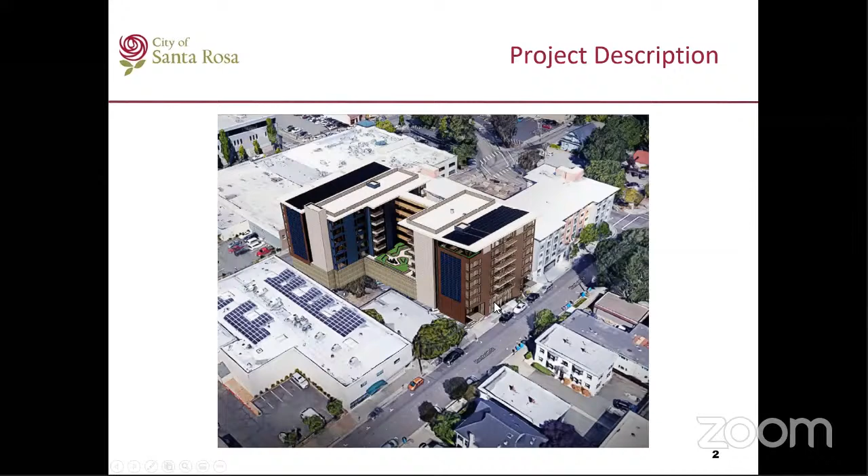Much of that remains the same, but here's a bit of what the changes are. The original project is 8 stories, mixed use, mostly residential building. The new version cuts the top story so it's a 7-story mixed use residential building. The original approval had 94 units, although density is not regulated under the Downtown Station Area Specific Plan.

It goes by FAR, floor area ratio, and so there's 88 units presented here. The breakdown was originally approved as 5 studios, 65 one-bedroom, and 24 two-bedroom units. Now there are 14 studios, 64 one-bedroom, and 10 two-bedroom units. Most of that came from having to reorganize how the building and all the units sat, with the changes done by the applicant.

Floors 1 and 2 are mixed use, and floors 3 through 8 are residential - that remains the same, except now floors 3 through 7 are residential. The square footage previously approved was 136,953 gross square feet.

Approximately, the current version is plus or minus 117,432 gross square feet. The internal courtyard and roof terrace remain the same size. The original approval was 86 feet tall, and this one is 77 feet tall. And there were 71 parking spaces previously approved, and 69 parking spaces with the revised version.

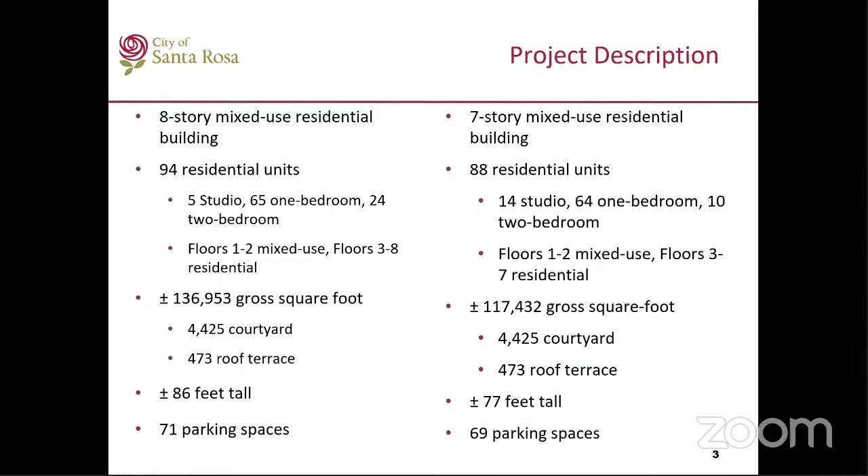So the general plan and zoning is core mixed use within the Downtown Station Area Specific Plan, with an FAR of 8. The modified project is right at the midpoint required by the zoning code, and the use itself is allowed by right. So it was just a design review pursuant to the resilient city development measures.

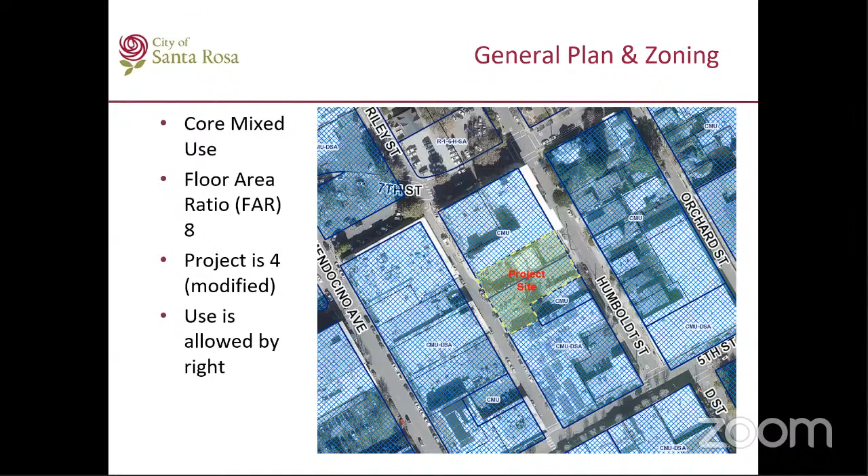So just to rehash some of what I said, the original approval was minor design review. After a concept design review, the item is taken before the design review board. That did happen on January 21st.

And the approval by the ZA was on March 24th, 2021. Zoning code section 20-54.060 is what this approval falls under, which is changes to an approved residential project.

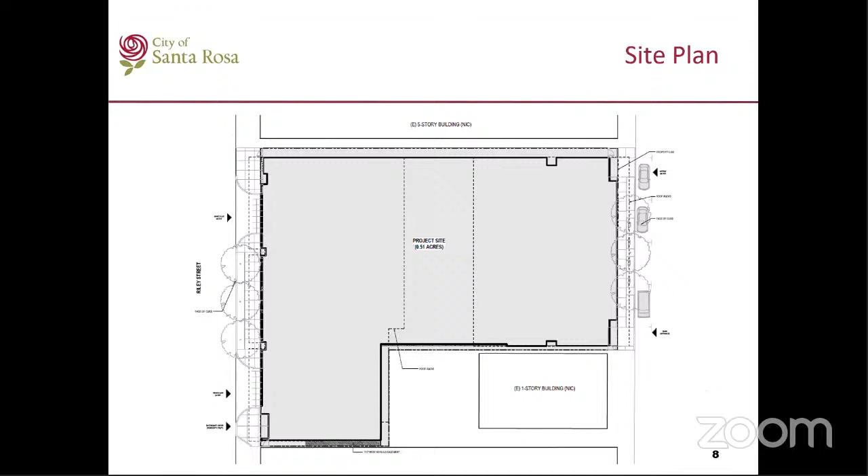So here's the site plan, which remains the same. Again, here's just for reference — this was part of the approved project that remains the same. The parking is essentially the same; I think there was a loss of 2 parking spaces, and the applicant team can verify that if need be.

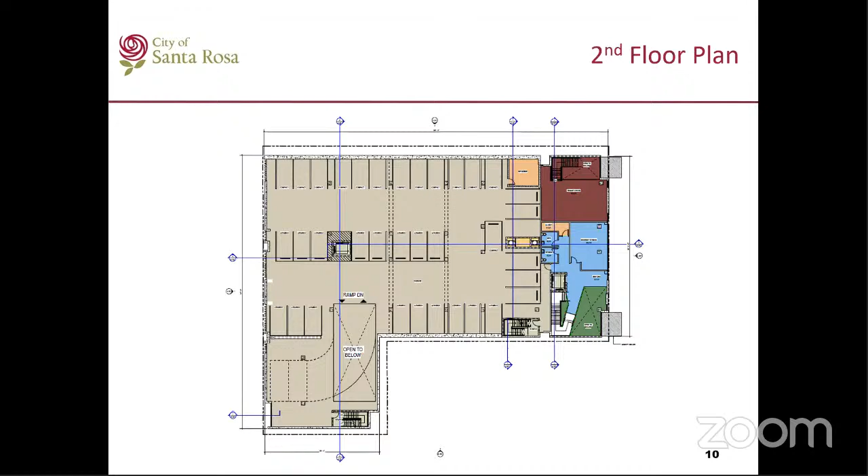So here's the 2nd floor plan. Most of the changes shown here are internal layouts, which are not really subject to design review, so this is mostly for reference. Also, the internal courtyard is pretty much unchanged — well, it is unchanged.

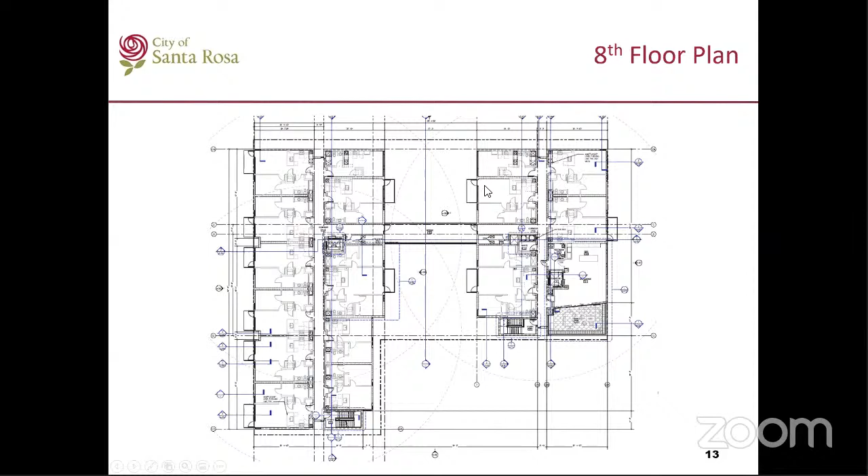Again, the same thing applies here — you have internal layouts, which are not really subject to design review. There were some changes to the patios provided north of the Sky Bridge as part of this project, which is in the project description, but those are minor architectural details. Here's the roof plan.

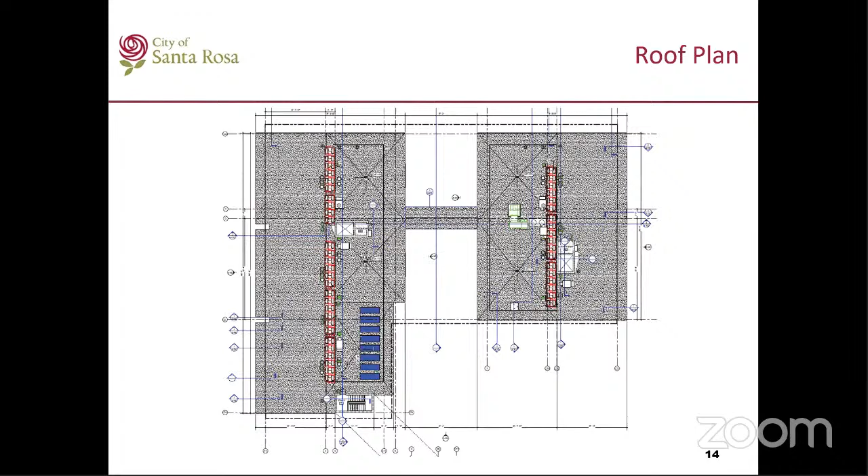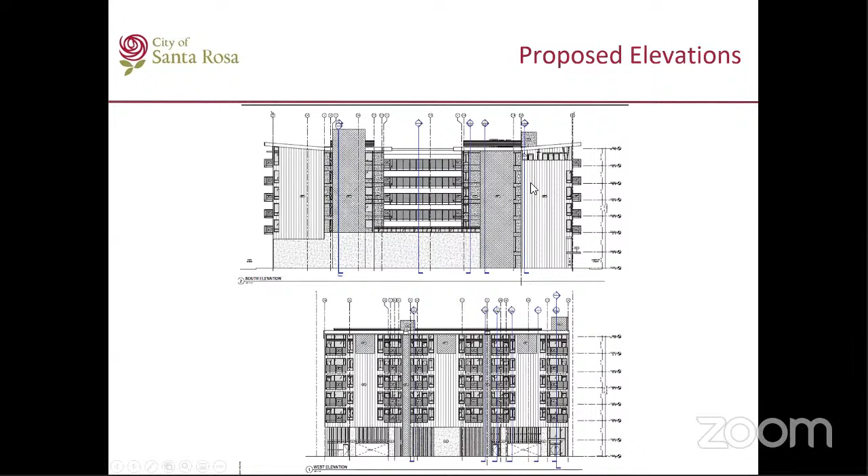There is some removal of these fixtures, which I believe laid over the actual siding, and those were labeled as optional PV photovoltaic solar panels on the original approval. If they could make it happen — these are shown without them, but that doesn't preclude them from being incorporated in the future.

Again, not much has changed on the first level. I think that's essentially everything I've covered here, and I'll let the applicant design team go over any more of this as needed.

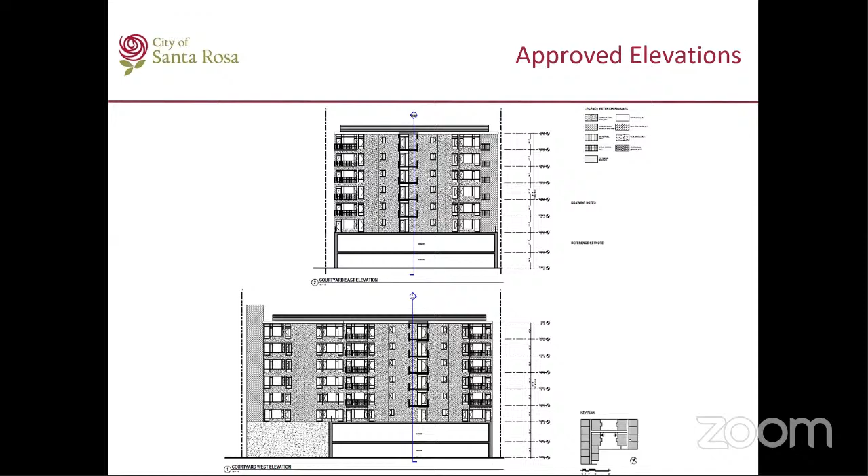And the same type of treatment is carried over on the west elevation as well. So the materials remain unchanged where in use.

And see, these were optional PV panels. This is part of the original permit approval, design review approval back in March 24th of this year. Some of the changes on this, it's less of an open air type balcony in these kinds of areas.

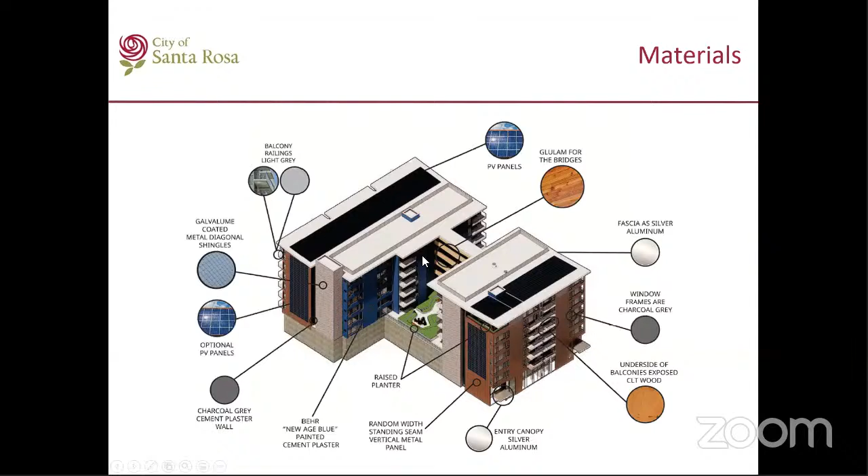And with that, the recommendation from the Planning and Economic Development Department is that the zoning administrator approve the modifications to the 425 Humboldt Street apartments, an approved residential project within the downtown station area plan boundary, pursuant to section 20-54.060 of the zoning code.

And I'm available for any questions. And the applicant team, they don't have a PowerPoint presentation, but we can reference what I've provided here should we need it.

You're muted, Andy. I had a brilliant start there. I'll have to do that over again.

So if I'm going to summarize, Adam, I would summarize to say minor modifications to the exterior balconies, rather than open railing, it's enclosed, minor modifications, not expansion or reduction in the windows or glazing. Approved elevation, materials, and colors remain the same with the exception of the solar panels on the south elevation.